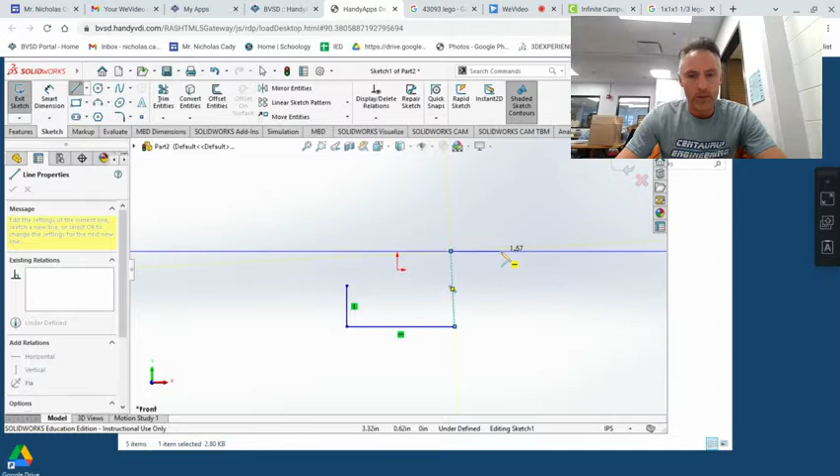Yeah, something like that. And we're going to connect that guy with an arc right over there-ish. Like I said, this guy is supposed to be vertical. Let me clear that out. And we're going to go ahead and lock that vertical.

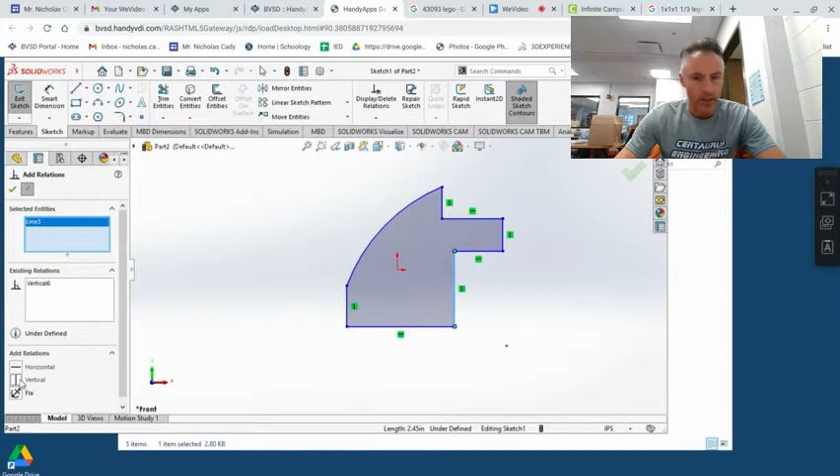All right, we're going to throw some dimensions on here. I'm going to skip that dimension, but we're going to go down here. It's a standard Lego width, so 5/16. This piece right here is 2/8, so it's taller than a normal plate, shorter than a full Lego.

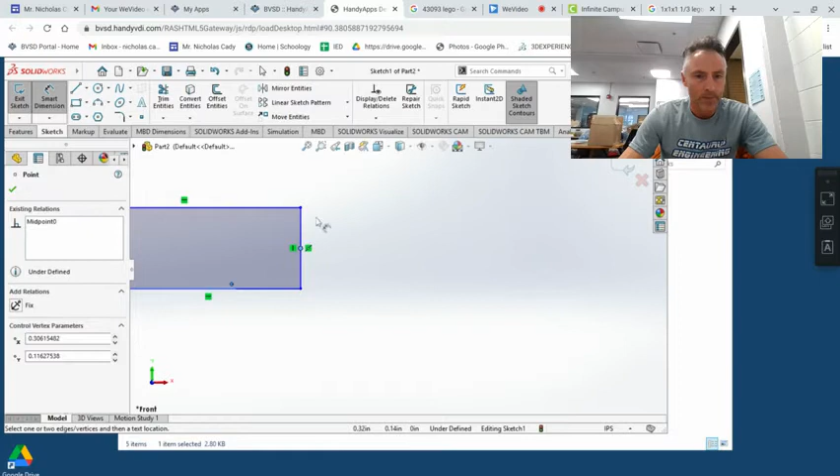All right, dimension. And this guy's going to be an 1/8 also. And then we got one more. This is going to be an 1/8 right in here. 1/8. Okay. This is going to be a Lego wide. So we'll throw 5/16. As is this. 5/16. And it's starting to look something like that.

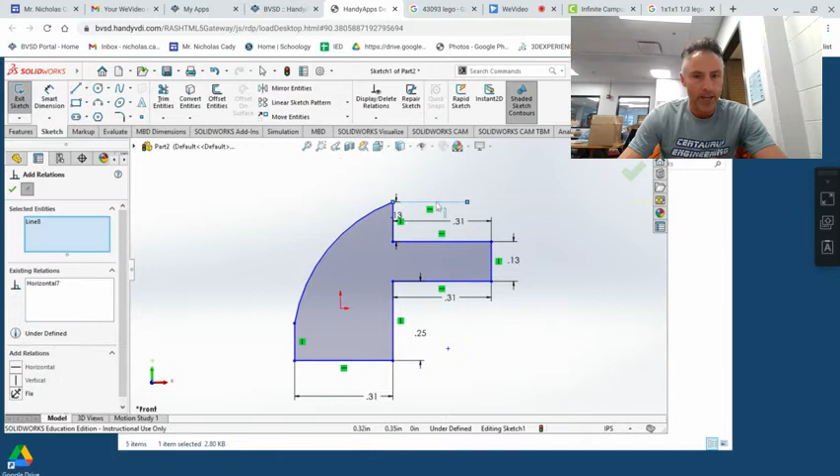Now we have not defined this straight away. We have not defined this arc yet. What I like to do for my arcs, I like them to be a perfect transition into the next piece. So I'm going to throw a horizontal line right there. That's not going to be part of our finished product, but I am going to tell that line and that arc to be tangent to one another so that it's a perfect transition.

Now, obviously, I didn't really want my arc coming way up here, so I'll accept that. I'm just going to grab this guy. Let's see if we can go ahead and now dimension this guy down. Actually, just for kicks, let's see what happens if we tangent them now, if that works or if it does something weird. Let's go ahead and say, hey, that arc and this line, if they were tangent to one another, it would look like that. And you know what? I'm really liking the looks of that.

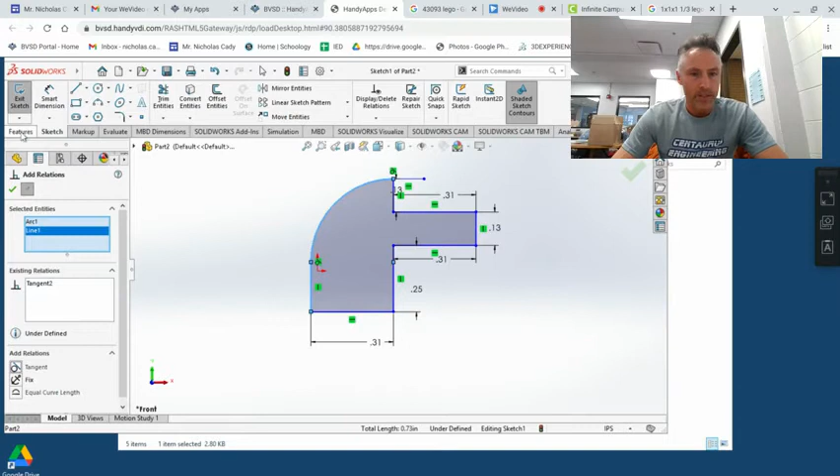So we're going to call that our piece right there with that sketch. And we're going to go ahead and extrude it. The one I'm going to make is just a single wide. So we'll go ahead and select that guy and extrude it 5/16, which will look like that. We'll say okay. And we're going to put a knob on the top of this face right here.

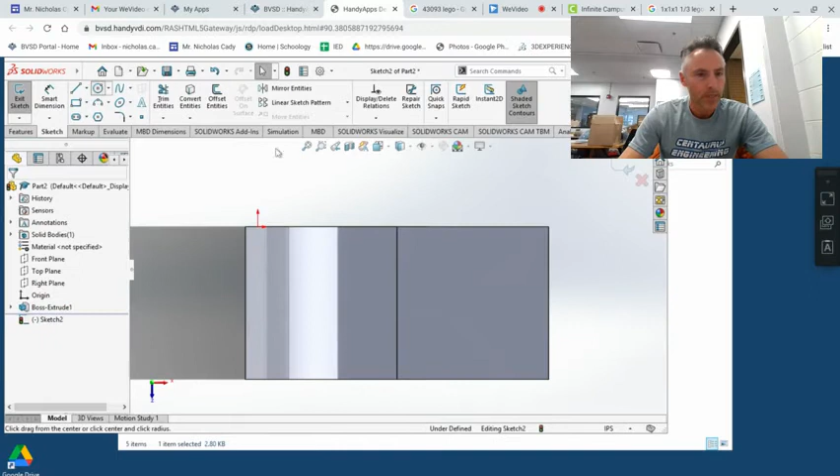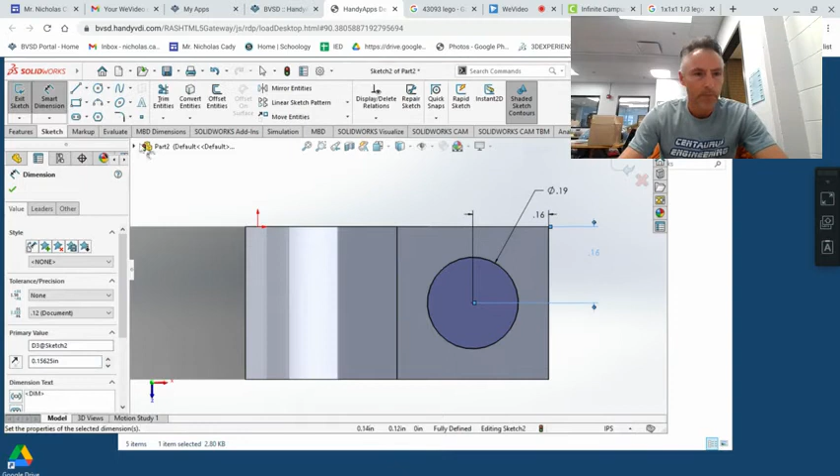So standard 3/16 and centering it from the sides. It should be half a Lego width, 5/32. And also this way, 5/32. And we'll extrude that guy up just like every other knob you guys have made. It'll come up 1/16. Okay, and we're just about done.

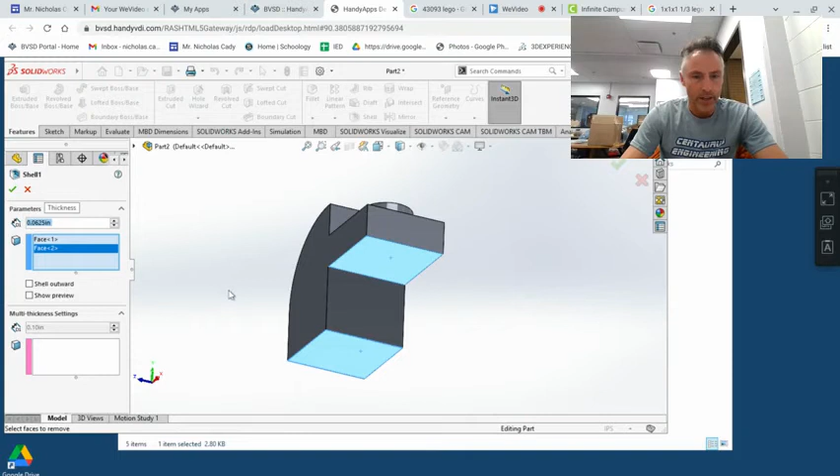So now we just got to finish this guy off with the shell. Choose that face, thickness 1/16, and that process is going to be our part.

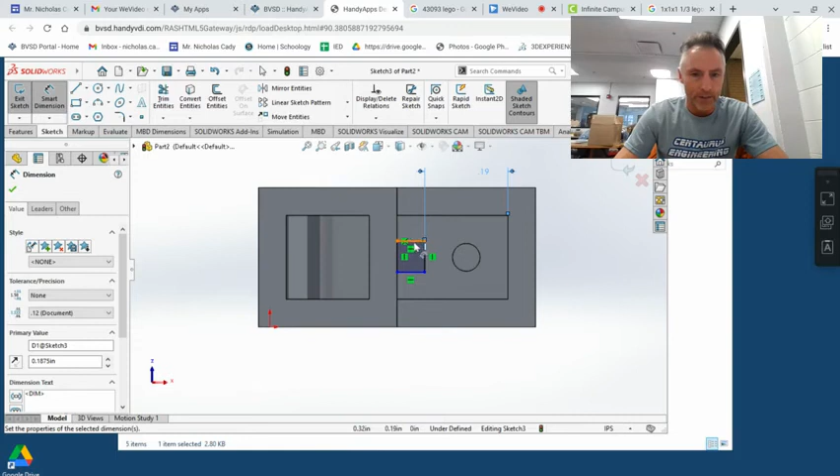Now, what you'll see in the real Lego, I'll go ahead and add it. It's unnecessary for you to do so unless you're that perfectionist that really wants it to be exactly how Lego did it. They will also put another little section right here. They're going to make sure it has a distance from here to here of 3/16. And this is to make sure the peg fits in perfectly. And I'm going to go ahead and dimension off of here of 1/16 and dimension off of here with a 1/16 also.

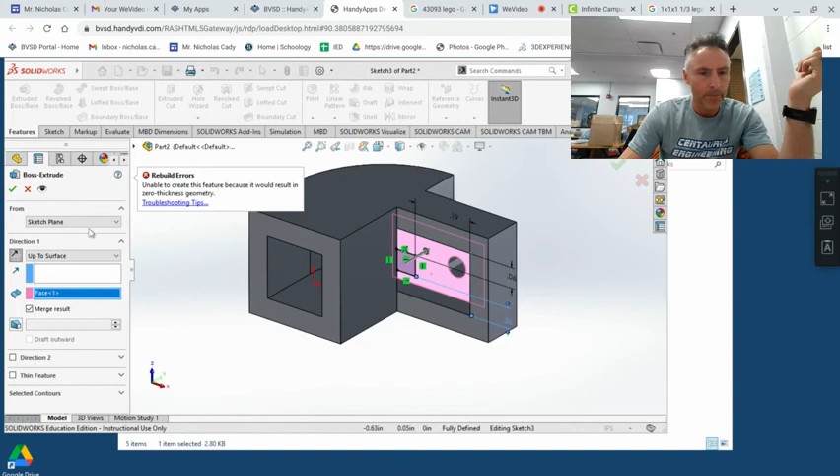And we're going to go ahead and just extrude that, a little rectangular square that we got. And to make sure it goes into that top piece, we're going to switch the direction. And I'm not sure exactly what the distance is. That may be perfect. But I'm just say go up to surface. And when we hit OK, just kidding. Let's just say up to next.

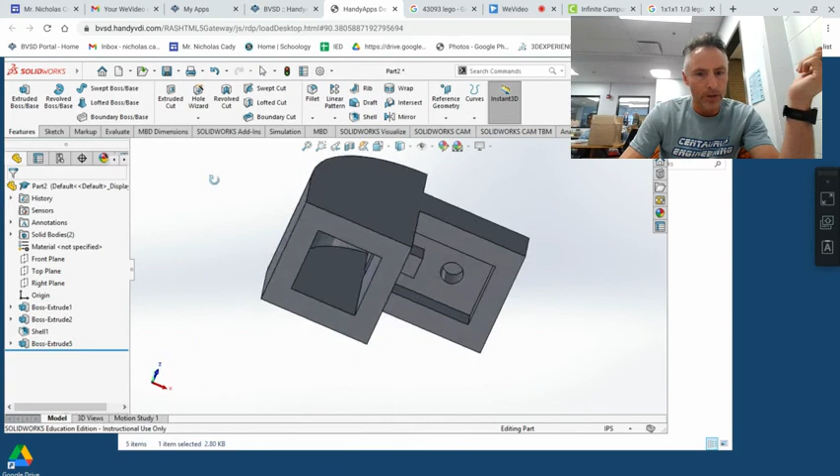It's giving a 0 thickness geometry. And what that means is there's some calculation in here it can't handle. So if we just uncheck this merge result, it's going to skip that one calculation that it couldn't figure out. And it should now make that part for us. Okay, now you have a peg that can fit there. And we are going to call that our 1 by 1 by 1 1/3 with arch.